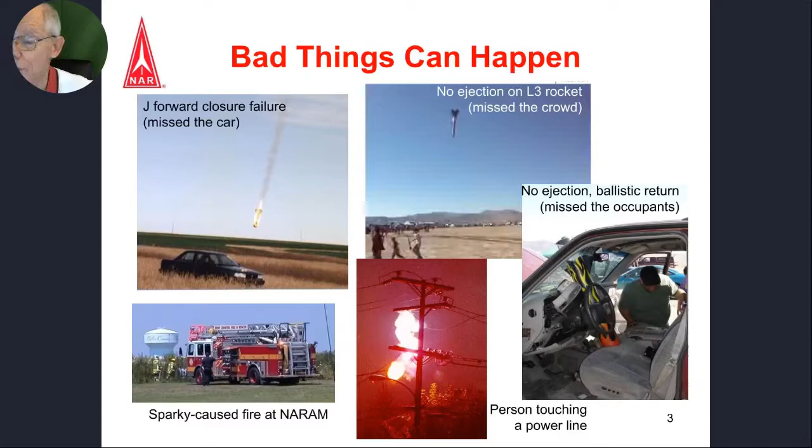So what's the risk history of our activity? Well, in this hobby, model rocketry and high power together, there have been at least 5 fatalities in the past 20 years from people who didn't apparently read, know about, or follow the safety code and tried to get a rocket off a power line. None of these happened under NAR or TRA insurance at one of our launches, but they happen.

The safety code prohibits it. If you are aware of the safety code and you follow it, this would never happen. Not everybody follows the safety code or even knows what it is, particularly in model rocketry. In high power, you are typically in a more structured environment.

Range fires. When the rocket lights, the ground around it will light too if you're not paying attention. And if the rocket were to land sooner than it was supposed to and the ejection charge goes off after it hits the ground, you can have a fire at the landing spot. And a range fire is something that has to get put out. Usually it expands pretty quickly beyond the capacity of the local launch organizers to put out, and fire departments get called.

And at that point, you have lost the launch site. So that's bad. Launch sites are hard to come by, and if you light them on fire, you're going to lose them. So we don't want to do that.

And then there's the possibility of damage or injury by rockets, almost exclusively on the return path, ballistic, or even landing with a deployed recovery system if it's a very heavy rocket. Far too often we drop rockets on cars or drop rockets on buildings, even under recovery. That's not good, particularly for high power rockets that are very heavy. You don't want to do that.

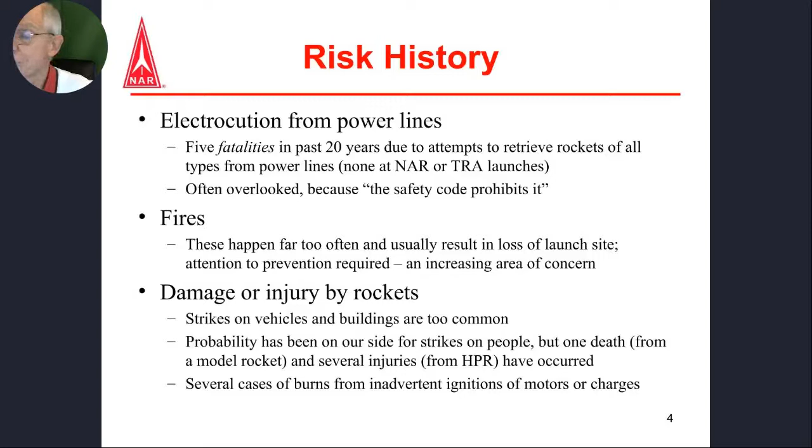None of these are good. So how do you not do that? So let me see if I can page down on my slides. So how do you keep bad things from happening? That's really the goal. That's what safety is all about.

Sometimes they're going to happen. You can do a lot of things to minimize the probability, but we'll deal later in the discussion with what do you do to make sure that if they do happen, injury and damage doesn't happen.

We have a great safety record in this hobby, relative to, for example, football, which everybody wants to play in school, in which people suffer life-altering injuries at a very high percentage rate, but it's okay. We don't want injuries to happen in the hobby because even one of them is not going to be okay. People are going to remember it, and it could have an impact on our hobby's record, our hobby's insurability, and even on our ability to have a hobby at all.

So the key to keeping bad things from happening is to follow the safety code. It was written by experience. I wrote a good part of it. The revision of the model rocket safety code that was done long after the version Harry produced was one I did, and I contributed to the high power safety code. And the NFPA committee that I belong to is responsible basically for establishing the requirements that we simplify and put in our codes. Those codes are designed to minimize the risks.

They only work if you know what they say and do what they say. And another way to minimize risks when something bad happens, which it will from time to time, is carefully laying out the launch site and operating the launch in the proper way, which will reduce the risks if something bad should happen at your launch, despite the safety code.

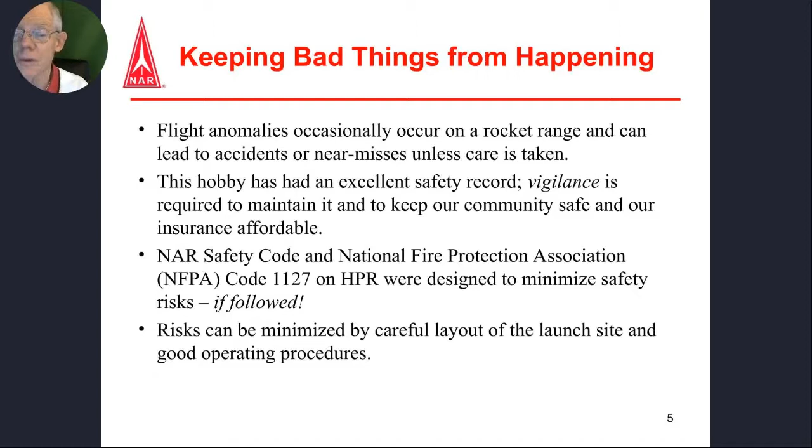So we had a run of really scary accidents back in the first decade of this century, and the NAR asked Dr. Jay Apt, who was a space shuttle astronaut who flew 4 times, to do his professional thing as an astronaut and a PhD, and have a look at the data to see what the root causes were of the safety incidents that had been happening, and give us some advice on what we might do to get after the root causes of those safety problems.

He did a fine job, as you would expect a Harvard PhD and an astronaut to do. Very systematic. He collected a lot of data from flight reports kept by NAR sections, and from that data—mostly model rockets, but some high power too—I think the same lessons scale to both types of rockets. The consequences are just higher for a big, heavy, high power rocket.

The average flight failure rate was 8.5%. And no surprise, rockets with multiple motors—called complex, stage, or cluster—were twice as likely to fail as simple rockets. 3/4 of all the failures were recovery system failures of various kinds. So that really became the focus: recovery is the problem. The safety certification of rocket motors leads to a very small percentage of them blowing up, and the standoff distances we follow make the consequences when they do blow up not a safety problem. It's really the recovery that's the key issue here.

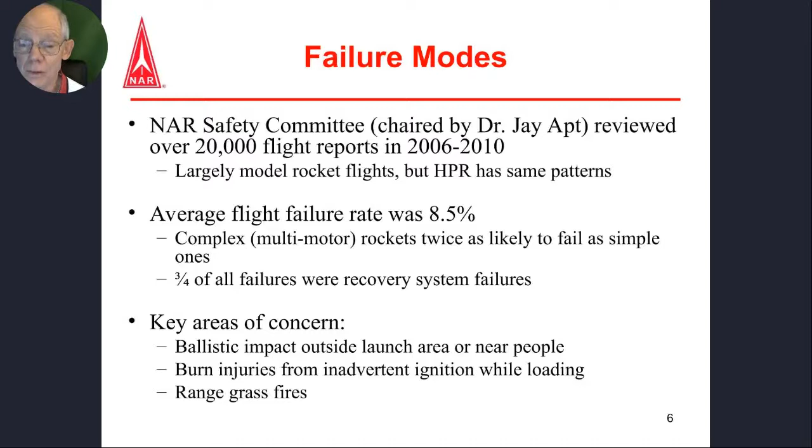The reason they're areas of concern is that we had real data that said they should be. Here's the data: a pie chart showing the failure modes of 6,169 flights, of which 523 had a failure problem. A couple of NAR sections were obsessive about keeping data and provided it for this study—very valuable. You can see the powered flight phase, upper right: motor CATO, motor unrestrained, shred, unstable.

Those were 1/4 of the failures, and all the rest were failures of recovery: separation, where two parts came down that should not have come down separately; no parachute, where the nose came off with no parachute; lawn dart, where the nose didn't come off; and core sample, where the nose came off but nothing came out, so the tube hit the ground vertically taking a core sample. 3/4 of all the failures were recovery failures, so that should be the focus—making sure those don't happen.

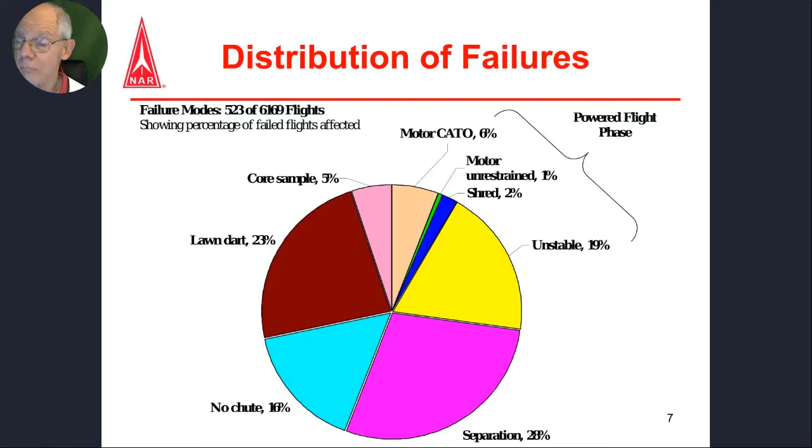So we'll talk about that. I'm going to step through a couple of sections here, and get to how you prevent recovery failures in later sections. The first thing I want to do, though, is talk about sharing the sky. Just a reminder: you don't own the airspace.

The FAA owns the airspace of the United States outside of military bases, and they have a set of rules, the Federal Aviation Regulations, that cover everything that goes on in the air and how they regulate it. There's a particular part that covers amateur rocket flying. High power rockets, under their definition, are Class 2 amateur rockets, and Class 1 would be model rockets, which do not require any prior authorization to fly. You have to do it safely and not near airplanes, but that's not a big deal. For Class 2 amateur rockets, high power rockets, you need to get permission to use the airspace in advance from the FAA.

That's called a waiver, and it's issued for a given place and time. It provides your ability to share the airspace—it does not give you exclusive use of it. It simply notifies airmen through a notice to airmen that rocket flying is occurring in that area, and they should, but do not have to, stay away.

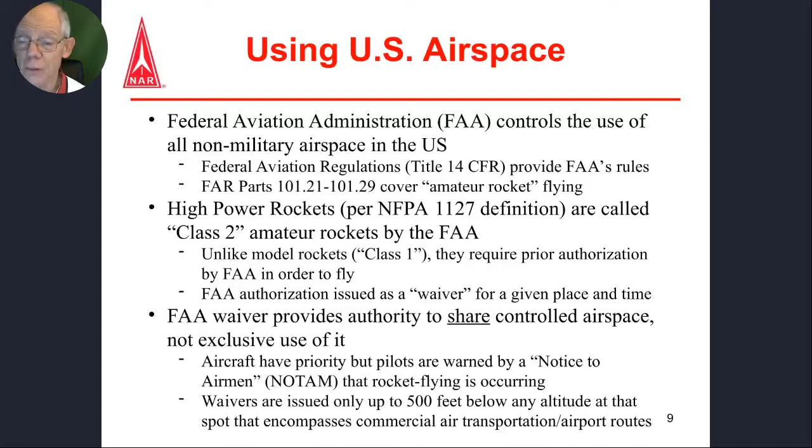If you're at Black Rock, you can get a waiver to orbit, basically, because there are no air routes that go over there. So it just depends on where you are and what the air lanes are around you. You're given a waiver which gives you permission to share airspace for a period of time, up to a certain altitude. You file for a waiver in advance, 45 days or more.

There are forms involved, this is on the NAR website. You can now get a waiver for an extended period of up to 2 years, every day for a straight period of up to 2 years, and you just activate it by making a couple of phone calls. That's your dream waiver. My section, NOVAAR, tried that and got it for every day, but only for 1 year, since our local region would only give it to us for 1 year. Still, we have a waiver for every day, so we can activate it any day that we need it. We can call in, go through the process, and get permission to fly.

Go to the NAR website for more details, but as I mentioned, the FAA is not going to give you permission to use airspace that airlines use on a scheduled basis. They may give you a window of opportunity to fly to a higher altitude than your general waiver, but if they do that, you're going to need some means of real-time communication with FAA air traffic control. That's kind of hard.

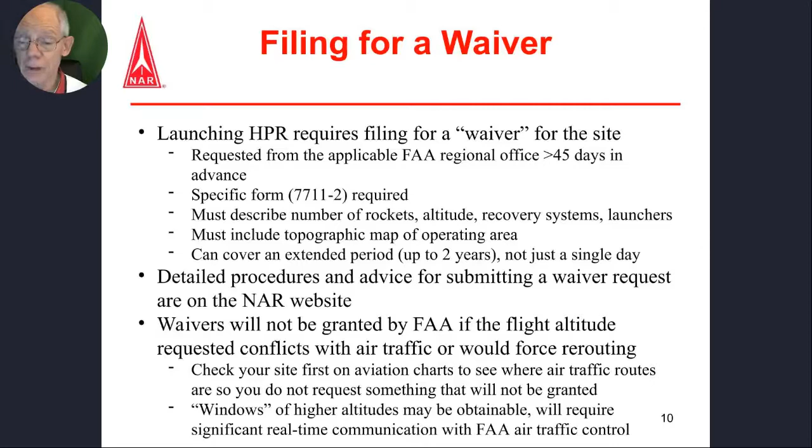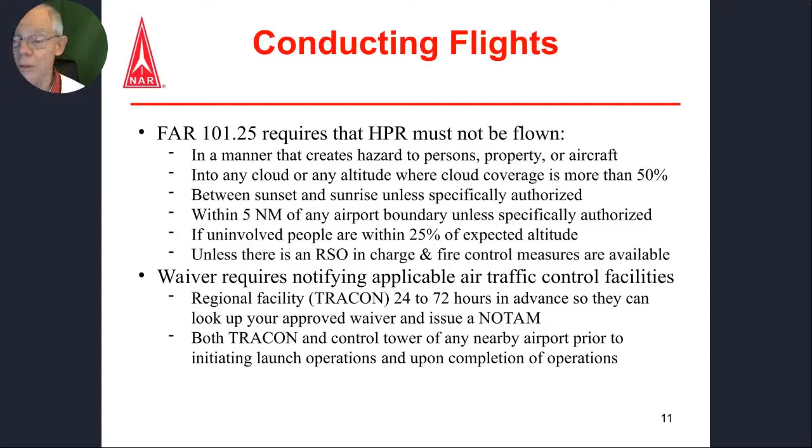You do have to phone in to TRACON and to any control tower for a nearby airport at a certain period of time in advance, so that you can have the waiver activated and a NOTAM published. That's how you share the sky. If you don't get this right, we will not be allowed to share the sky, so don't foul this up.

The key factor here is to keep your rockets from impacting people who are not aware that they're coming and have no opportunity or time to get out of the way. If you're not paying attention, your rocket can outfly your field. Your launch site is not just the little piece of dirt you fly from. In terms of the safety code, the launch site is where your rocketry activities occur, including the landing of the rocket. So you're not supposed to land your high power rockets outside the periphery of the property within which you have permission to fly.

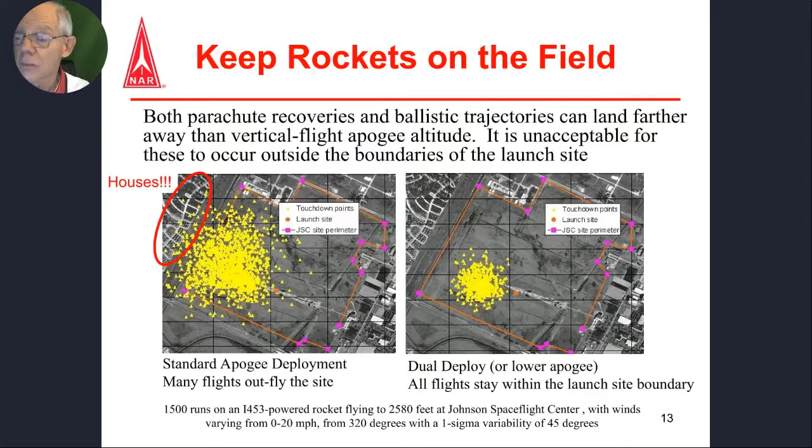Where do you want to put the spectators? Not upwind, not downwind, but crosswind. If you're paying attention to wind direction in your range layout, you position the spectators crosswind. Now, you may be at a launch site where you don't have a lot of alternatives as to where you put cars or people. So what do you do in those cases? Well, you could not fly. If you're dropping big, heavy rockets on the parking lot, stop it. Don't fly. Change the launch angle, move the cars, reduce the altitude at which deployment must occur, or don't fly. But don't keep dropping rockets onto the cars and hope nothing happens.

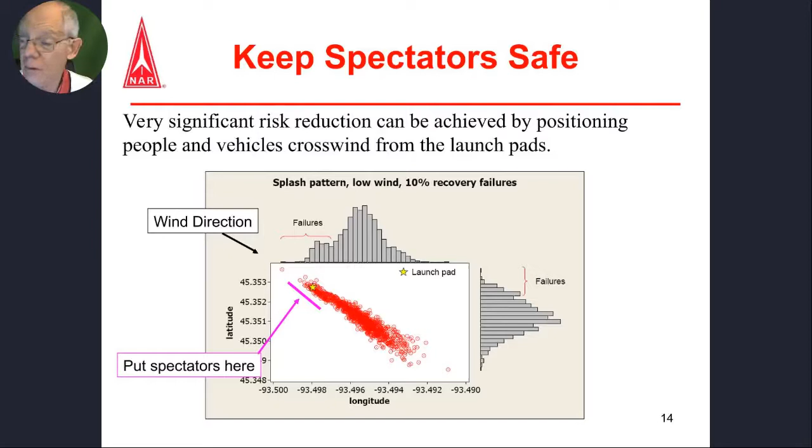And you can predict where they're going to go based on the wind direction. So this is something you really need to pay attention to based on conditions of the day and the circumstances of your launch site field.

Now you can put the launch pads fairly far upwind so you have maximum opportunity for rockets to drift downwind without exceeding the boundary of your launch site. If you have flexibility as to where you put the launch pads, spectators, and cars, you can play with those based on wind conditions of the time, and lay out the site so there's very little risk that when something bad happens, something dangerous results. You don't want that to happen.

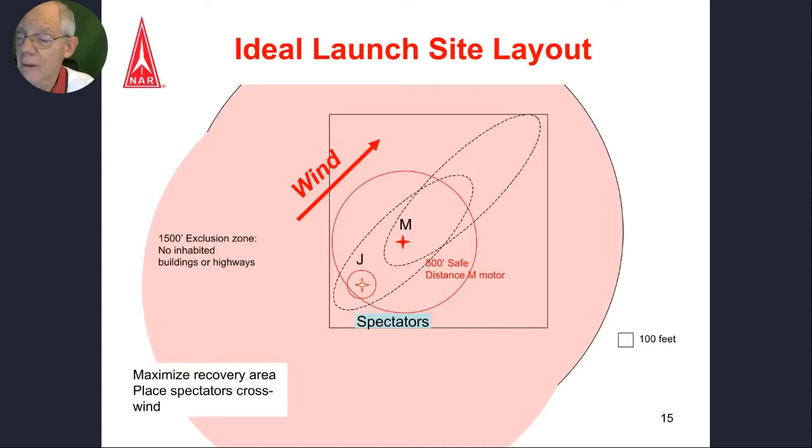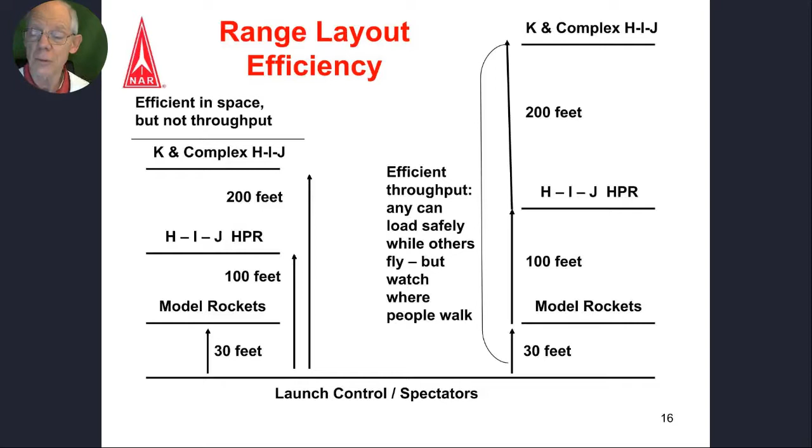Fires should be prevented, but sometimes they're going to happen. You can control whether a fire happens at the launch pad by doing what's in the NFPA code: use a blast deflector and totally clear the area near the launch pad, strip it, denude it. If you can't completely do that, lay Nomex pad blankets out. There is a specific cleared radius within which you can't have dry grass or anything burnable, and that radius is increased by 50% for sparky motors.

You can use pad blankets, but you need to hold them down because the rocket motor will pick a pad blanket up and sling it. If it's too dry, don't fly. If there's a fire ban in effect for your county or state due to burn conditions, that means model rockets and high power rockets cannot be flown without permission of the fire marshal for that jurisdiction. Pay attention to the news, and if there's a fire ban, this means you.

The real risk for fires, if you're paying attention to the area around the launch pad, is the rocket crashes downrange, the ejection charge goes off on the ground, and something catches fire there. So you need to have the appropriate stuff available to deal with it.

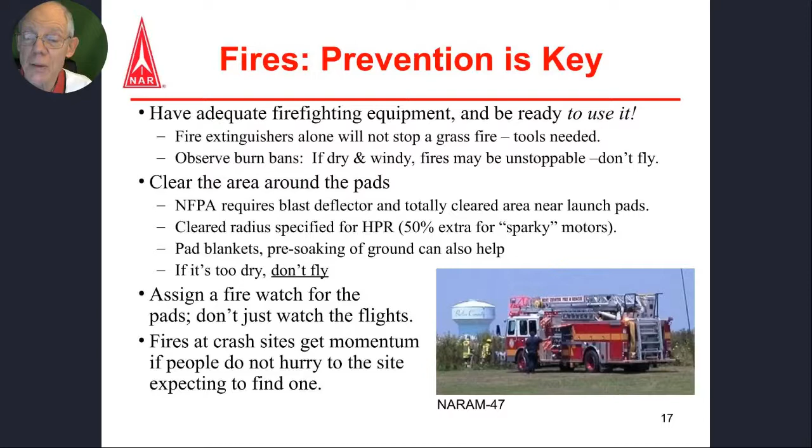Okay, let's talk a little bit about prevention, which involves inspecting the rockets. I'm not going to give you the whole tutorial on how to do a pre-flight safety inspection. I'll just hit a couple of the really key points in what you really need to be looking for.

Safety check-in is the most important range crew position at a high power launch, probably at any launch. If you have people who are more experienced, it's more important to have that experienced person at safety check-in than it is as RSO. You'd like experienced people at both, but this is the key one, because once the rocket's out on the pad, all the RSO can do is say whether it can fly or not and whether the launch angle is appropriate.

Those are important, but all the details that you can go through to make sure the rocket is likely to work are done at safety check-in. You need to empower the person who does this so that person can say no. If someone's rocket is not safe, you don't put it on the pad and say this is a heads-up flight - you just don't fly it.

You need to have them have the tools they need, which may include scales for example, and some clear guidance on the procedures and the support of the club if they make a decision that something just is not safe to fly and can't fly.

There should not be any appeal there. If there is an appeal, you can have a reasonable discussion, but if you override the person who has made the safety judgment just because you want to see it fly, and so-and-so is a good guy, good gal, that person is no longer empowered and you may as well remove them. This is a really important position, and you can't be worried so much about people's feelings. This is easy for me to say after 41 years in the Navy, where I'm used to telling people what to do, but this is really important.

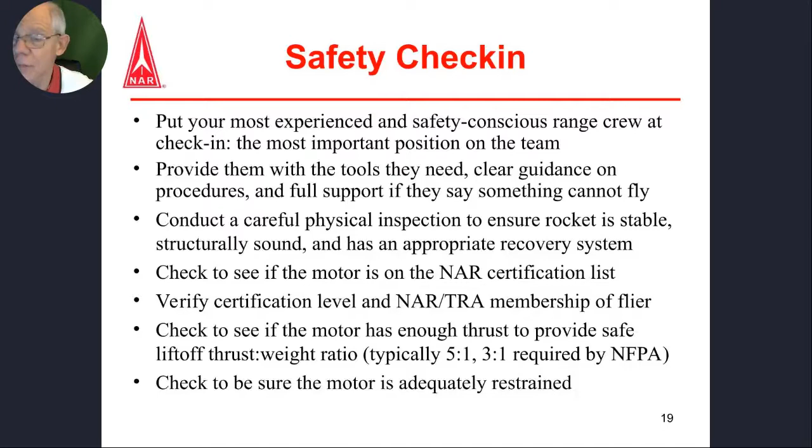You need to make sure the motor is restrained properly. Another important one: if anybody is using motor delay and motor ejection on their high power rocket, I've quit doing that because I don't trust it. But if they are, you need to make sure the delay time is appropriate to the weight of the rocket, so the delay goes off at apogee and not seven seconds after, when the rocket's coming down at high speed.

So what are you looking for? Remember, 75% of failures are due to the recovery system, and when the rocket is presented at safety check-in, the recovery system is already packed, so you don't quite know what's inside. You need to have a conversation with the person about how they did it, what's connected to what. Better yet, a peer review from someone who watched over their shoulder as they packed it, to make sure all the snap links or quick disconnects were screwed together and everything else is connected properly.

Some of those recovery problems are detectable and preventable. Drag separation of a heavy nose cone at burnout, for example. Friction fitting the nose to the body, or two sections of a rocket body together, for a high power rocket is a really, really bad idea — you just shouldn't do it. It's not a safety code requirement that you can't, but I wouldn't ever let somebody fly a high power rocket using friction fit to hold two body parts together. There's just too much energy in those rockets for that to be reliable.

Shear pins. The harness system that connects the rocket together for recovery should not use non-forged eye bolts, the ones that are just bent over — those are the ones you get at Home Depot. Whatever bends them over can result in their unbending; I've seen them straighten right out after a high speed ejection. You should not use elastic in high power rockets — that's fine for clothing and model rockets, but not high power rockets. Use plenty of nylon or Kevlar shock line. Kevlar has no give to it, so those need to be longer.

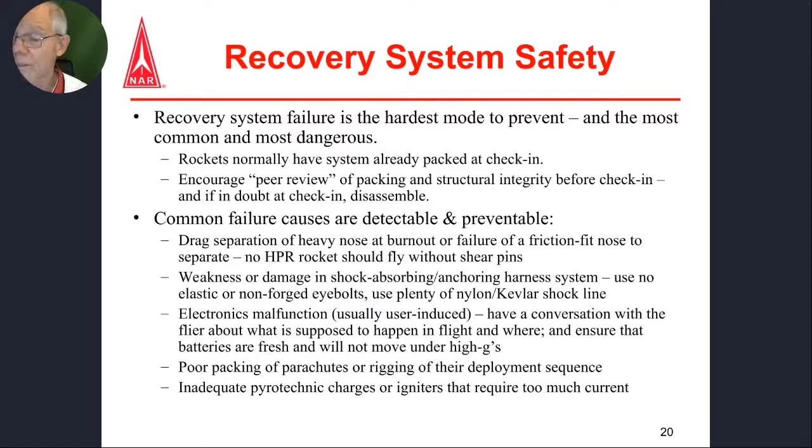Stability is always a concern, but as I mentioned, the frequency of occurrence of instability is fairly rare. So you can certainly use simulation tools to determine the center of pressure of a rocket. And your high power flyer, if there's any reason to think the rocket might not be completely stable, if the CG-CP relationship doesn't look right, have them prove to you where the center of pressure is by calculation.

Then you can just pick the rocket up and balance it on your arm and verify that the center of gravity is forward of that by one or more calibers.

Stability is also influenced by the launch device. So if you're flying a high power rocket on a rod, you must have never seen the launch videos where they take a video from underneath the rocket on its way up the rod. You can see launch rods whipping around from their springs, whipping back and forth as the rocket approaches the top of the rod. When you see that dynamic in slow motion, you realize a rod is a really bad idea for a heavy rocket. So you should be using a rail.

And the rail needs to be on a launch pad base that doesn't wobble or move sideways. Remember, the rocket motor is on the side of the rail. When that rocket motor lights, it kicks the rail. And if the rail isn't rigid, it kicks in the opposite direction, downward at an angle from the side the rocket's on, which would lead to a launch departure angle different from the one at which the rail was set. I've had that experience, and I had a bad flight where the ejection didn't go off, and I crashed a rocket near people. It was all because the base the rail was mounted on was not sturdy enough.

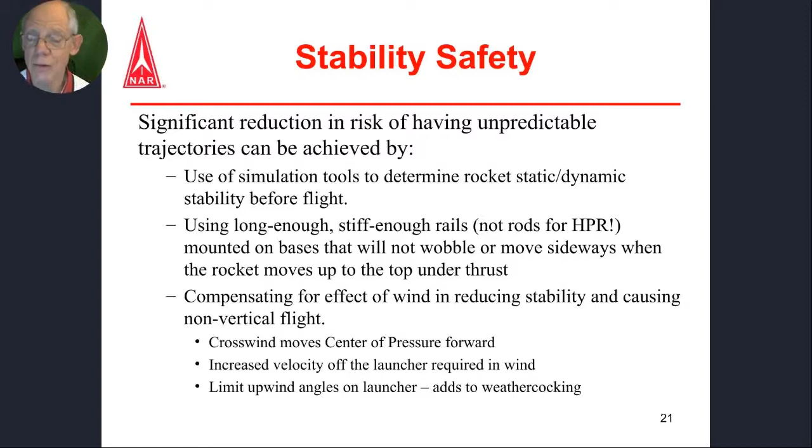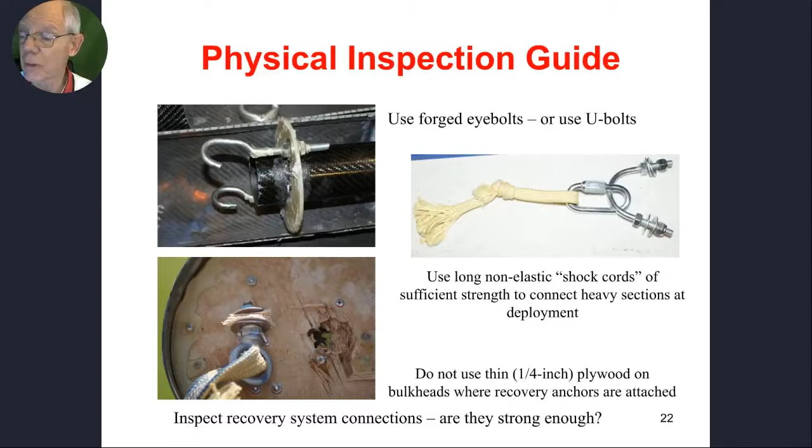This part is fairly straightforward. Is the motor secured in the rocket? No one should be friction fitting a high power motor into a rocket. There should be a positive retention device of some kind. There are many different brands and approaches, but the objective is to have the rocket motor stay in the rocket throughout the whole flight. If the rocket flyer is a beginner, you might want to make sure you understand how the rocket motor is going to stay in the rocket going up, that it's not going to fly through the rocket.

High power reloadable casings have a lip on the outside, so the motor mount system should take care of that. Single-use motors may not, so it's a question to ask.

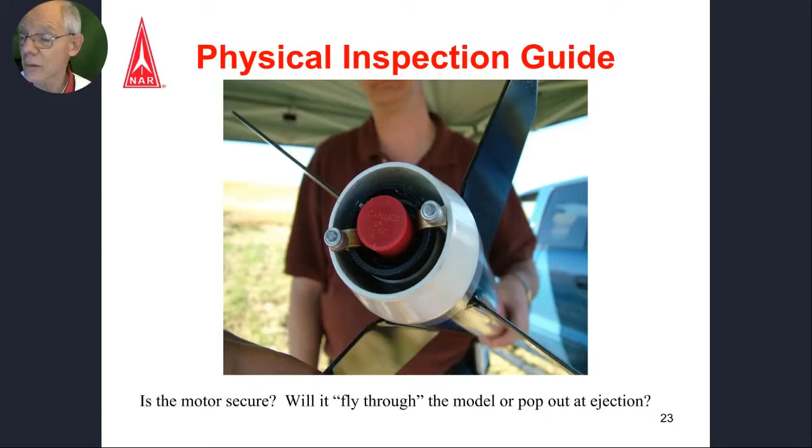Finally, is the recovery system big enough to keep the rocket coming down at a reasonably safe final descent velocity, which may be after the dual deploy or maybe after the Jolly Logic chute releases, but something around 20 feet per second is a typical safe landing speed. So you typically use a drogue at apogee with a delayed deployment of the main, because if you're coming down at 20 feet per second from 6,000 feet, you're drifting forever.

And as I mentioned before, don't friction fit, use shear pins.

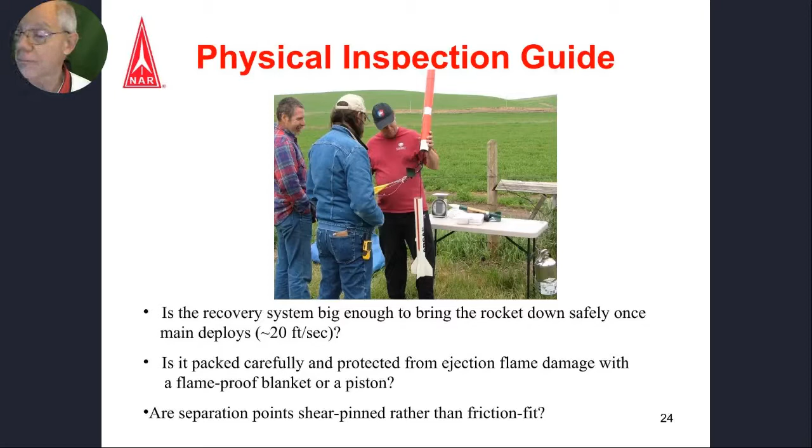So operating the range, a little bit of procedural guidance here. The RSO under the NFPA codes is the single person responsible for ensuring that everything happens safely. There is no right to fly, there's a duty of safety. So it's okay to say no, and it's your job as RSO to say no if something is not going to be safe. If you think it's not going to be safe, saying this is a heads-up flight is not the right answer. Don't fly this rocket is the right answer.

And if something happens on the flight that didn't work out, that it turned out to be unsafe, well, stop and figure out what just happened and do something to make sure you correct the procedural failure that led to that, or the launch rail angle that led to that trajectory being really unsafe and the rocket drifted towards the crowd. Do something. Don't just watch a bad situation happen and then hope it doesn't happen again, but don't do anything to change it. That's just not how you do safety on a rocket range.

And we're all guilty of this when we're RSO. You get launch fever, so you're focused on the next flight and you're not paying attention to everything around you. You get tunnel vision and you don't look at the sky enough, and there's an airplane coming and you never saw it, or somebody's crossing the range in a place too close to the launch pad and you didn't see it. So you just need to slow down.

When you're launching model rockets and you're trying to get one off every 30 seconds for a bunch of kids that are all on A motors, that's one thing. If you're launching rockets with high power motors in them, just slow down. Don't get that launch fever.

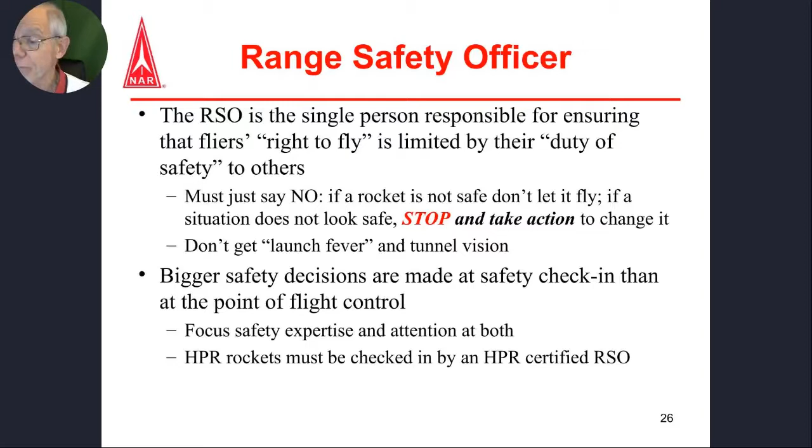A couple things on launch pad safety and control. Test every pad before the launch to measure the firing battery charge, make sure that the battery is going to work, clean the clips and rails, and do all that stuff.

Make sure that the launch system is electric match safe. A lot of people are going to be using E-match type igniters, or igniters that will go off on fairly low current. Most launch systems these days are safe. Do not do a continuity check with enough current to ignite an igniter. But if you're using an old launch system that used the incandescent bulb technique for showing you there was continuity, an incandescent bulb will allow enough current through it to cause an E-match to go off. So old launch control systems were guilty of this.

Modern ones typically aren't. There should be a way to disconnect the pads from the launch system or de-energize them, positively de-energize them, to make sure that when you approach a pad to load it, you, the flyer, are absolutely certain that there's no energy going to those clips, no way that any energy could be going to those clips.

And certainly it's bad practice if you have a row of pads or a whole bank of pads. None of them should be flown while any of them are being loaded, just in case somebody back at launch control gets some switches confused. You don't want a pad flown that was not intended to be flown, especially if there's anybody at that pad.

We have a requirement now that you minimize the number of people out at the pads when loading. No spectators, no children, no family members. This is for high power, right? So we're not talking model rockets, none of these rules apply there. But for high power rockets, there should be only a couple people out at the pad and no children, no family members, nobody, no spectators, just people who are directly, actively engaged in getting the rocket ready to fly.

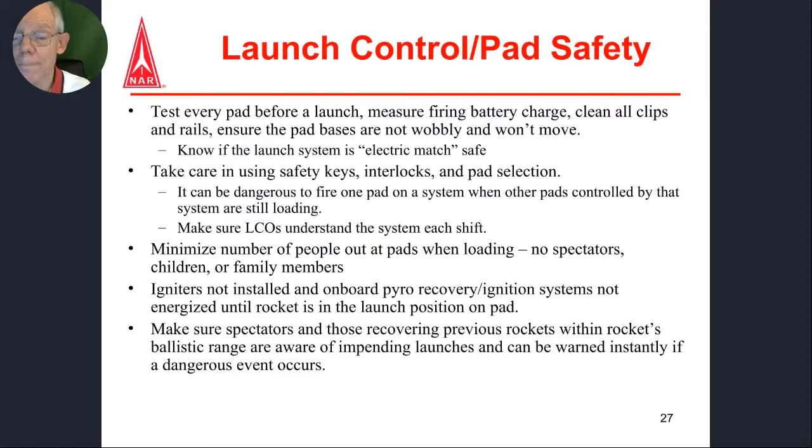Of course, you don't connect the igniter or turn on your recovery system electronics until the rocket is vertical on the pad. And then make sure before you fly that people who are returning their rockets from previous flights are not anywhere near the pad as well. The launch standoff range applies to everybody. Photographers are not exempt.

I mentioned earlier that you want to angle the launch rails to make sure that the flight path points away from the crowd and that the rockets land only within the launch site. So if you overfly the spectator or parking area on recovery, if rockets are drifting over those areas, stop it. Do something. Change the launch angles and inspect that that's being done, or just don't fly. But don't keep flying rockets over the heads of people.

You're supposed to have a PA system. You're required to have a PA system that can be heard by everyone in the launch area. Don't overuse it. Don't call heads up for everything so people won't listen anymore, but be able to call heads up when you really need it.

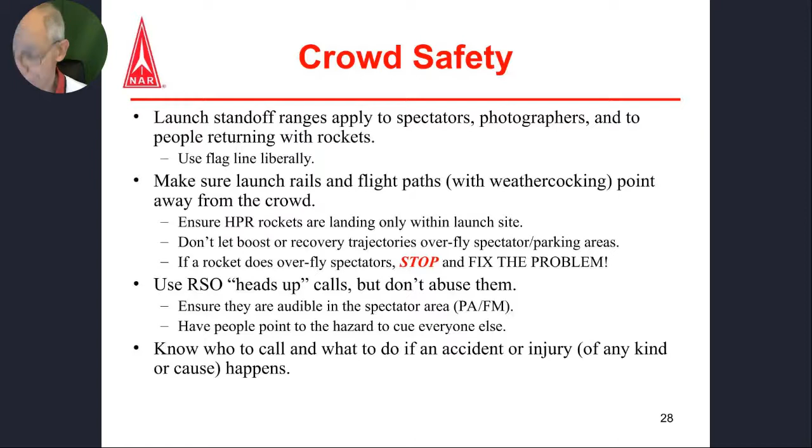If something lands on a power line, call the power company. That's all there is to it. Call the power company. No, and under no conditions whatsoever do you try to go get it yourself, even if it's hanging down low. In fact, if it's hanging down low, you better call the power company right away so no one's tempted.

So this has been kind of a long talk. I wish we could talk back and forth by voice, but we can't. Safety is important. Our society has a lot of lawyers in it, and they make their living by lawsuits, and you don't want to give them anything to create a suit from. One of my personal goals is to make sure we have more people go be aerospace engineers that would have otherwise been lawyers. But in any case, there's a lot of lawyers around, and you just don't want to do anything that would cause a lawsuit to occur as a result of somebody is injured or somebody's property is damaged.

That's something we can control. If you are a responsible rocketeer, you understand the risks, you understand the safety code, you understand the requirements, and you make big person adult decisions about whether you fly or don't fly and what can fly, we have a safe activity and it'll stay safe. The energy levels of our rockets in high power rocketry make safety incidents really dangerous, so you just can't let them happen. So it's our job within our hobby. We're self-policing to make sure that the safety of the hobby is preserved. And hopefully I've given you a little bit of guidance here on how you might do that.